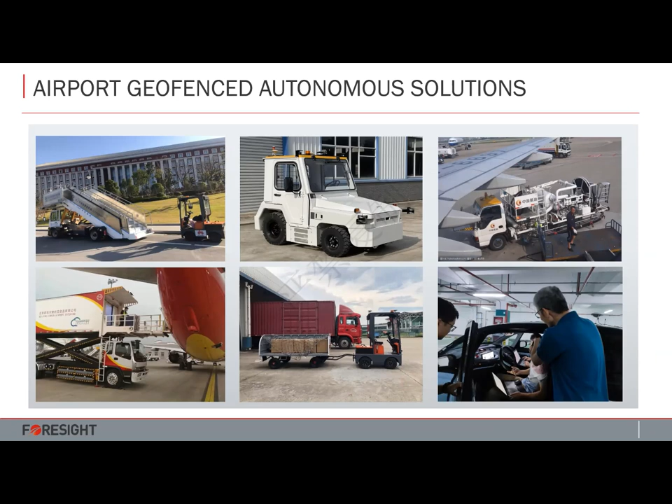About the airport geofence autonomous solution we are working on with SUNAWAY: different use cases include boarding trucks, autonomous logistic vehicles, fuel charging trucks, and other vehicles in an airport geofence solution. The first project is a boarding truck with a modular stereoscopic solution by Foresight integrated onto it, enabling it to reach as close as possible to the aircraft.

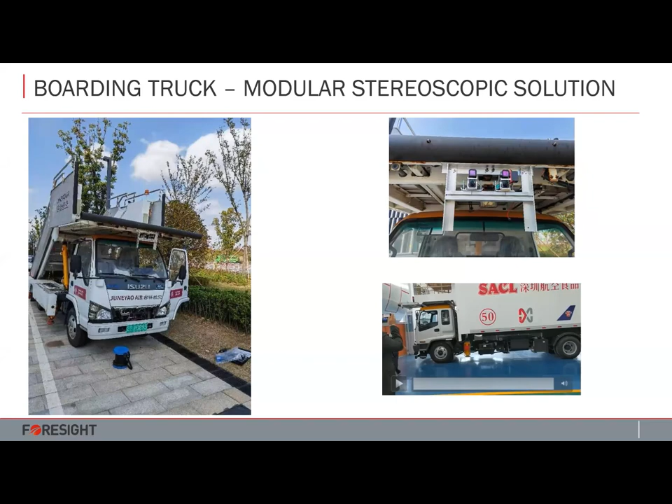You can see this in this video. Our vision technology enables the boarding truck to arrive within up to 5 centimeters distance from the aircraft safely, using our visible light and thermal infrared solutions.

Looking forward, we will continue our efforts in China in different segments, whether autonomous vehicles, agriculture and heavy machinery, or geofence autonomous vehicles such as airports. We will continue to be a player in exhibitions, conferences, and face-to-face meetings with leading OEMs and Tier 1 companies. We are very pleased and proud of our achievements in China, and thanks also to our dedicated team in China. This is on my side for today, thank you for your time.

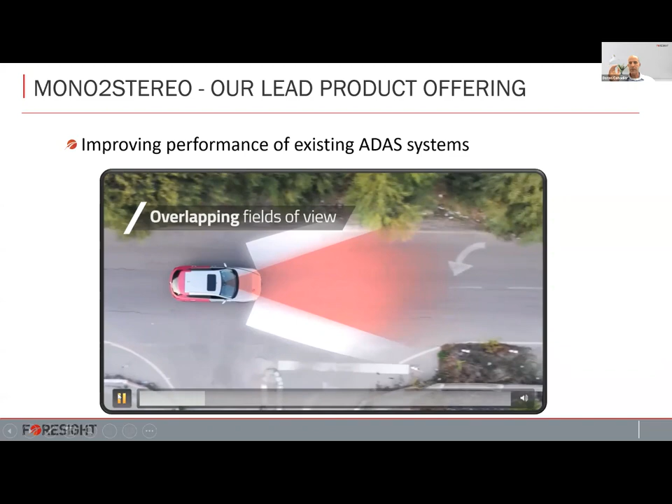So basically what you see here is a parking camera, an ADAS camera. It's already on the vehicle. They will continue doing whatever they do. Both of them are facing the same direction. The ADAS camera is in red - that's its field of view, a narrower camera. The parking camera is a wide camera, a fisheye camera, shown in white. As long as both of them are facing the same direction, in the overlapping area between them, we can create 3D perception. This is just a different angle of seeing the same thing.

Now, what you see here, this is the raw feed that we get from the parking camera and from the ADAS camera. The parking camera is a very wide camera, like a fisheye camera. The narrow camera is an ADAS camera.

Each one will continue doing their own application. Parking will continue doing the parking application, and ADAS will continue doing ADAS. What we do is tap onto the raw data coming out from these two cameras, and these are two completely different cameras, different field of view, different resolution, different locations, and not connected on the same horizontal bar. Basically, we create from these two different cameras a 3D stereo.

The basic layer is a 3D depth map. It's a pixelized color image. Every pixel has its XYZ location in space. Close pixels are colored in red, and as you go far it becomes blue. This is the basic layer, on top of which we add different layers like what you see on the right-hand side. This is the detection layer, showing the detection of all the vehicles and the pedestrian at the end.

So we're proving that with existing hardware, which is already on the vehicle, and a piece of software, we take it from 2D to 3D and provide 3D perception to the vehicle.

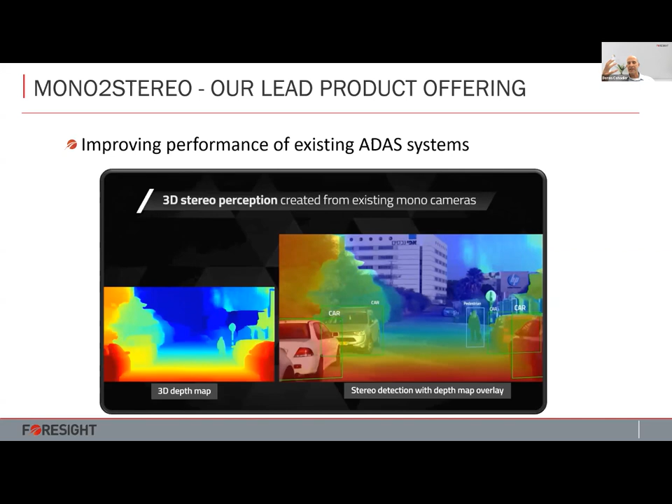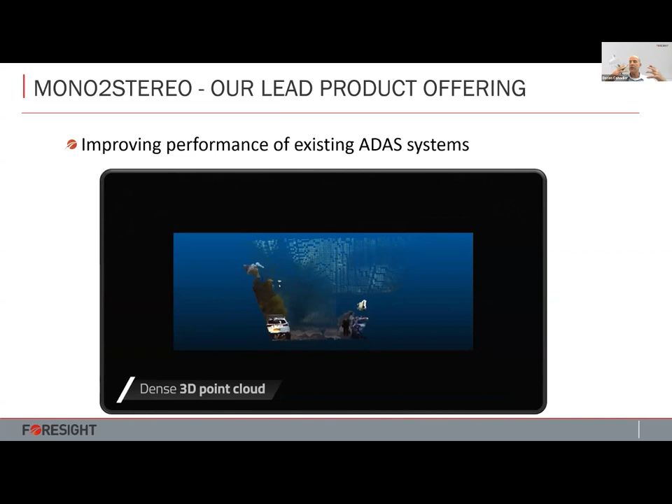Of course, taking the depth map, we can create point clouds. You'll see in a second. Point clouds are a different representation of a depth map, and this is how a LiDAR and a radar present data. However, since we're using cameras, there's more resolution, more pixels per square inch, therefore more information. So it's very dense in terms of information.

To summarize, three main points. First, the ability to create 3D stereo perception from existing 2D mono cameras. We're simply providing a piece of software, so the OEM, the vehicle manufacturer, does not need to add additional sensors. It just uses the existing sensors, adds software, and gets an additional layer of safety. By doing so, we can enhance the detection and perception capabilities of the ADAS system. This is our most leading product offering, and there's a lot of attention in this area.

Moving to another development, again based on the ability to separate the cameras with auto calibration. The automotive industry always wants to see further down the road, smaller objects with higher accuracy. If you remember, I mentioned earlier about more traditional stereo - it's limited in how far it can see and in accuracy. By separating the two cameras from the rigid beam of a traditional camera and placing them around the vehicle, we can now enhance the capability of the stereo.

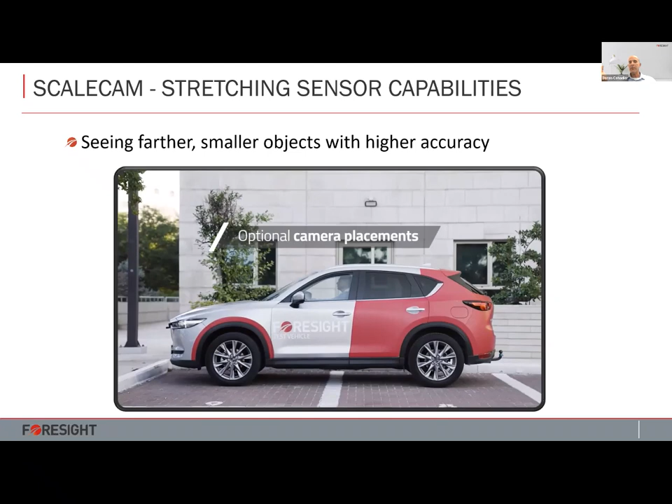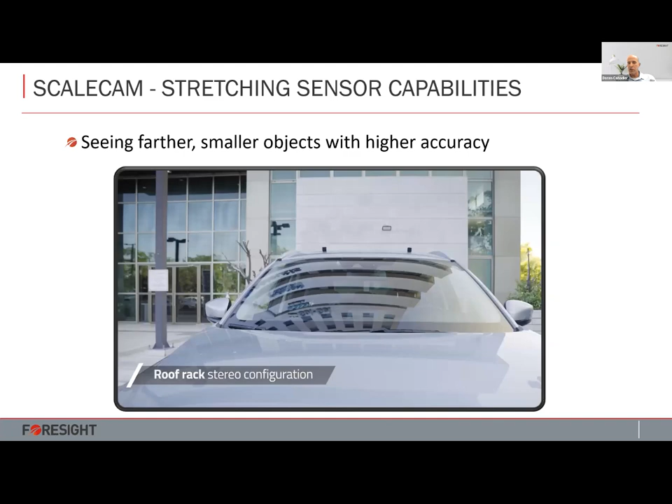What do we mean by this? For example, we can put the cameras not only behind the windshield, but in the side mirrors, in the roof racks, as you'll see in a second. Again, this is only for illustration - obviously it will be part of the vehicle, you won't see the cameras. We can put them in the grills, wider behind the windshield. There's a lot of real estate in which we can now put our stereo cameras on the vehicle.

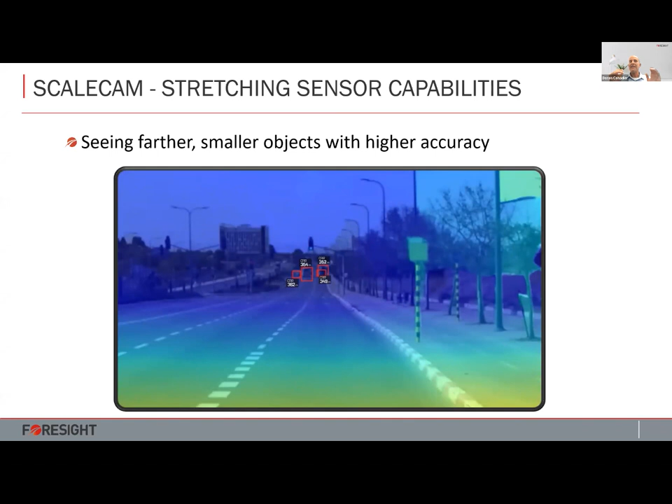A second advantage is separating and increasing the distance between the cameras. This represents a more traditional stereo, with a very small distance between them - we call it a baseline. Let's say we look at a truck a little more than 400 meters away. The accuracy error is 9% at 400 meters - we measure 436, but the actual distance is 400, so we're missing by around 9%. This is not acceptable by the automotive industry.

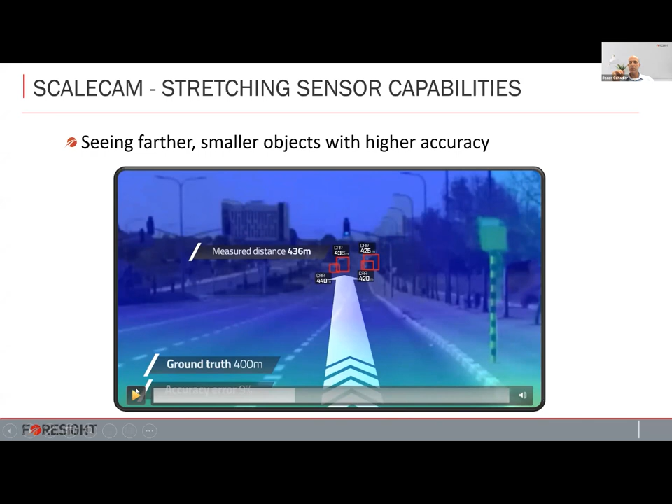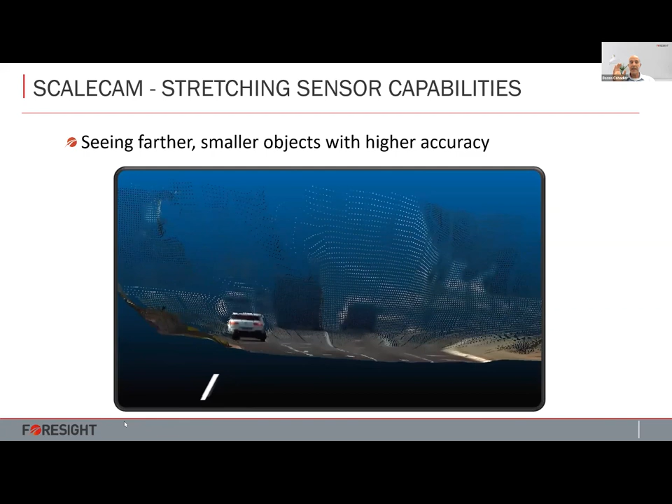What we do now, taking the same cameras, separating them so they're not connected, and putting them at the sides of the vehicle, we can increase the performance. So again, looking at around 400 meters with the same truck, we reduced the 9% error to 4%, which is good enough for the industry. So now we can see further down the road with higher accuracy, which is acceptable by the industry.

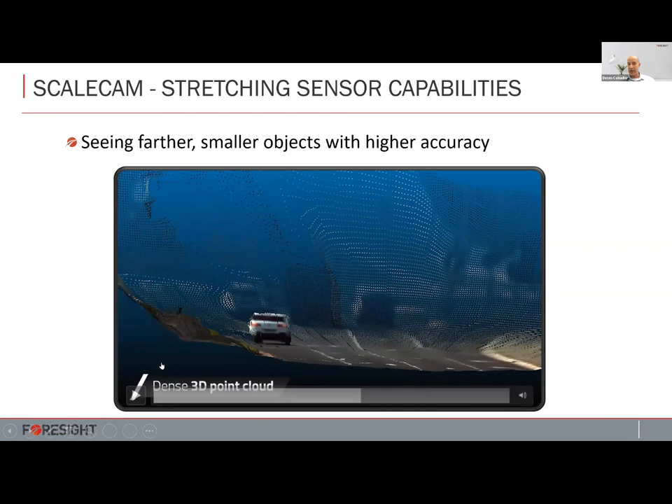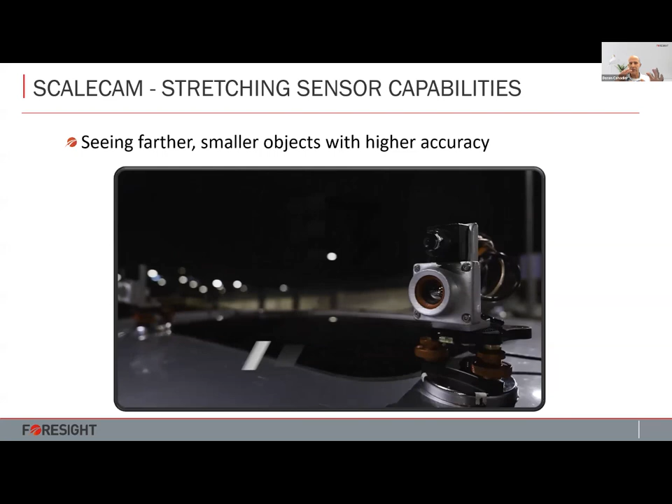Not to mention, we can create point clouds as well. In addition, we can do the same thing with thermal cameras. We mentioned earlier the talk about thermal cameras - thermal allows us to see under harsh weather conditions, not only at night, but in foggy and dusty conditions.

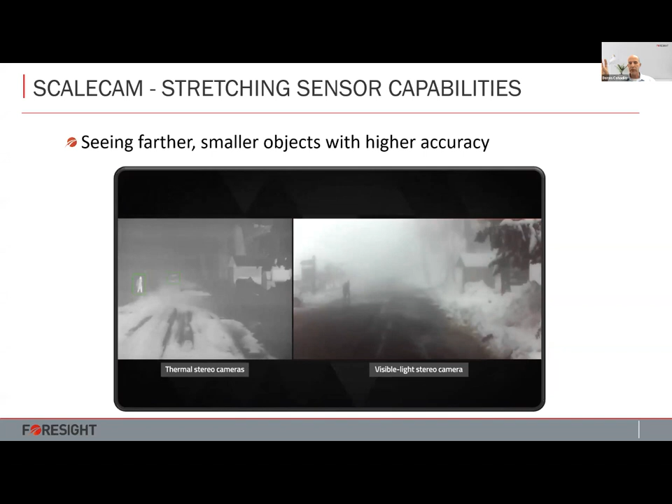You can place the thermal cameras anywhere you want on the vehicle, because with the automatic calibration, we can put it anywhere. And the more we increase the distance between them, the better the accuracy.

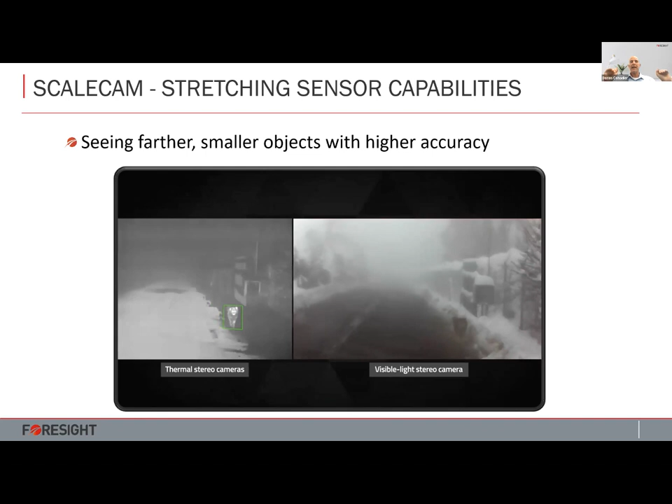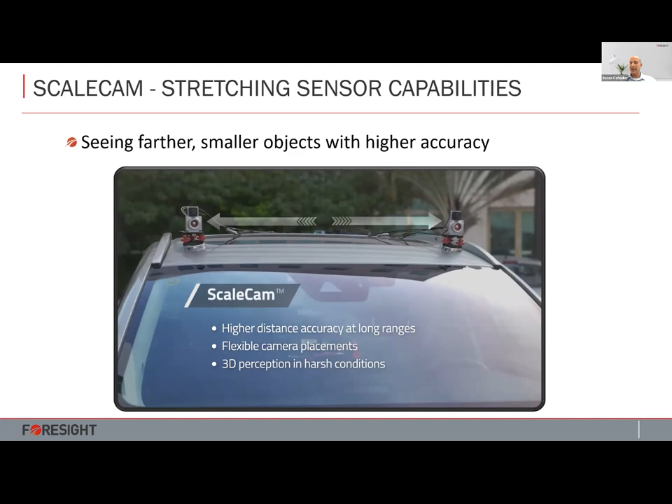So to summarize, ScaleCam, the ability to separate the cameras and increase the distance between them, allows us to see at higher distance accuracy with longer ranges, flexible camera placements, and provide 3D perception under harsh weather conditions. So these are the new developments, which lie upon the automatic calibration software I mentioned earlier. I want to take you a little bit to the latest success stories.

Basically, these are the success stories of 2022. We mentioned already Sunway-AI, which is a great success so far. In addition to that, we have a few more.

Hitachi on the right-hand side here, and we'll hear Sakata-san in a minute elaborating further about Hitachi. Hitachi basically develops stereo vision. These guys are stereo experts. It's a very large tier one specializing in stereo vision in Japan. And they developed the stereo vision solution for Subaru, Suzuki, and other companies.

We did already almost 2 years of work between us evaluating different technologies, and recently we finalized a proof of concept of the mono to stereo. As I mentioned, that's the most leading product. But I'll leave Sakata-san to talk in a minute and elaborate further about Hitachi.

ZF on the left-hand side, another success story. ZF is the third largest tier one in the world. Beginning of this year, 2022, there was a contest, a pitch event at CES, in which we competed with other startups in the field of ADAS and autonomous vehicles, and we won first prize. First prize is doing a joint proof of concept, again on mono to stereo. Now we've successfully finished it, and we're moving to the next steps, the next discussions.

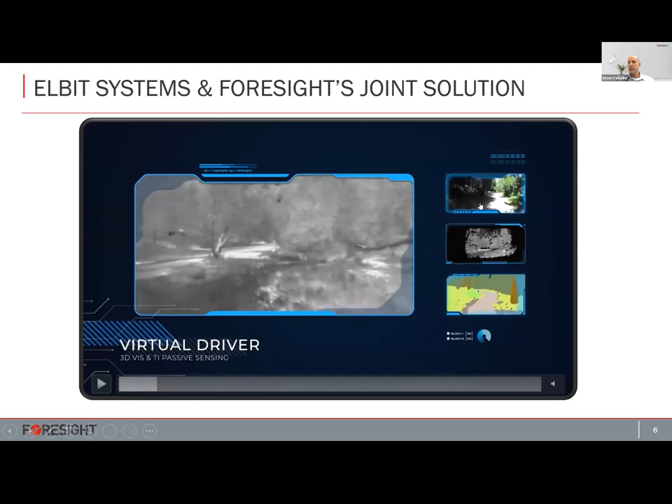Let me show you a quick video. What do I mean by perception? This is actually the UGV autonomously driving. What you see here are different views of our technology: this is a thermal point cloud, this is a visible point cloud, and different layers of information we provide the UGV.

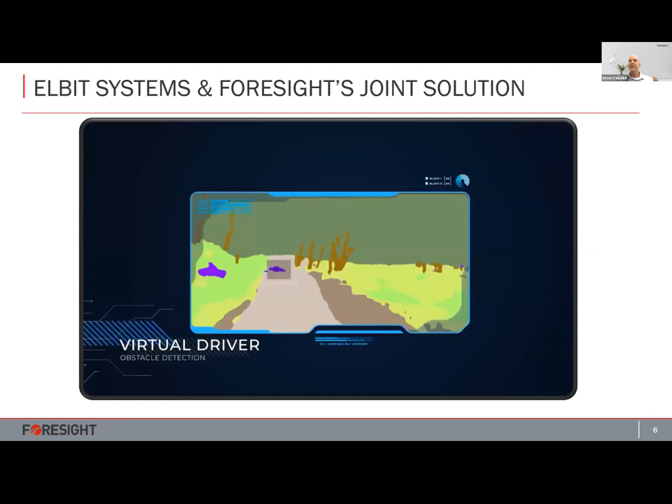Now it's planning a path to reach a certain area. It uses Foresight's perception in order to see the world in 3D, and based on this, it makes decisions. For example, in this case it has an obstacle on the road, so it calculates a different path off-road in order to go back to the path and continue driving, based on Foresight technology. So it's not only autonomous driving—there are other autonomous operations—and we're very, very proud of this work with Elbit Systems in the defense world.

Just to finalize a little and talk about the sales cycle: up until today, and we continuously do so, we engage with clients either through a technological roadshow, in which we fly over to customers and show our technology, providing them with prototypes and doing testing pilots. This leads us to the next stage of paid proof of concepts.

This is where we focus on demonstrating technological capabilities and validation according to customer specification and requirements. This takes, on average, depending on the statement of work and the vertical, somewhere between 3 and 6 months. We've already successfully finished a few proof of concepts—the ones I mentioned, Hitachi and ZF, fall under this category.

And when we're successful with the POC, we move to the co-development stage. This is where both parties jointly develop a tailor-made solution according to the customer's specification, aimed for a specific vehicle and application. This is exactly what we've done this year with Elbit, customizing our software for the unmanned vehicle I showed you. This takes on average between 6 to 12 months, depending on the statement of work and vertical.

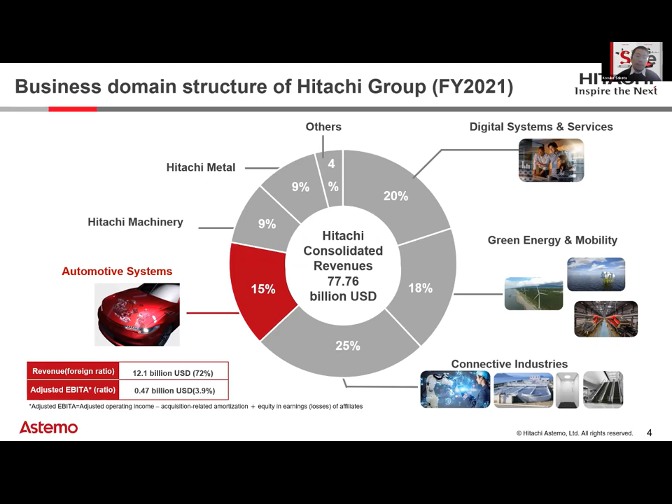Hitachi Astemo develops and manufactures all components of autonomous driving and advanced driver assistance systems. A particular focus in recent years has been sensing technology, and Hitachi Astemo has many years of experience with a 3D sensing device called a stereo camera. Its most famous product is the stereo camera sensor used by Subaru and Suzuki. The feature is that it uses two cameras to measure distance in 3D, just as a human eye does. This allows the system to provide safety in difficult situations where a single camera would be difficult to handle.

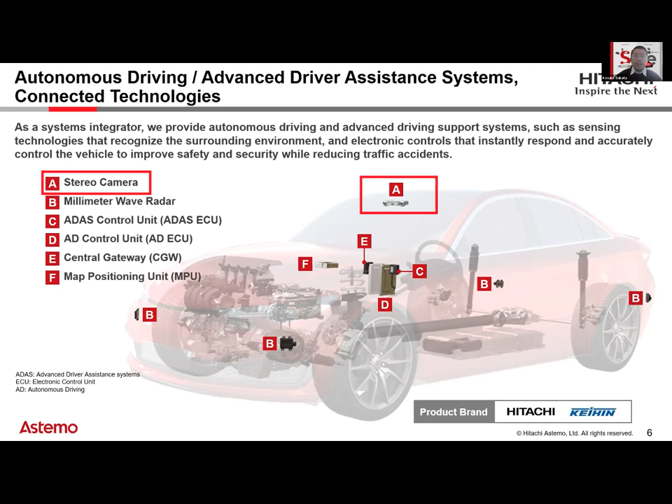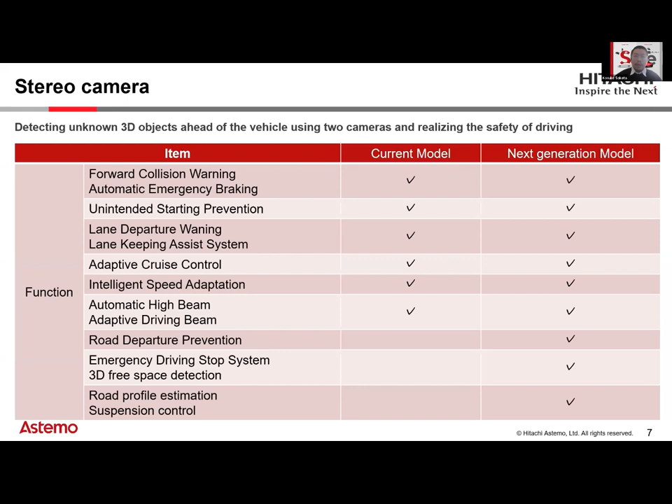Our stereo camera product can provide ADAS functions such as adaptive cruise control and lane keeping assist system, but we are developing the next version of our system, which will be able to handle more complex scenarios to meet the performance requirements of autonomous driving. For example, 3D free space detection will be possible.

3D free space detection is a technology that, as you can see, recognizes areas where driving is possible with a high level of accuracy. It will also be able to detect other small changes on the road surface, such as speed bump detection. We have been looking for a breakthrough to make these advanced technologies more advanced and viable products.

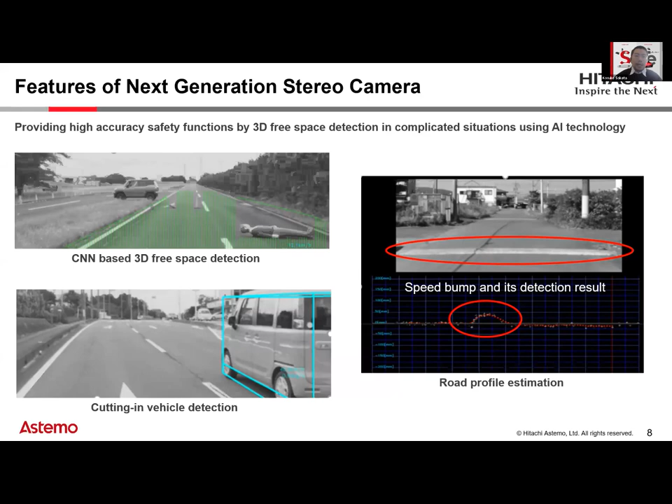And with our meeting with Foresight, finally it is starting to happen. We have been running a joint POC, proof of concept, with Foresight since 2021 to explore the synergy between their QuadSight or mono-to-stereo technology and our stereo camera systems. Finally, we have succeeded in realizing a new 360-degree stereo sensing concept in cooperation with Foresight.

To achieve this, the two cameras must be calibrated with high precision using software technology, and this is what Foresight had the great ability to do. We worked with Foresight to build this demonstration vehicle and exhibited it at our Hitachi Astemo Tech Show 2022 in Japan. Of course, the support from Foresight is excellent. All Japanese OEMs attended and were able to experience these technologies.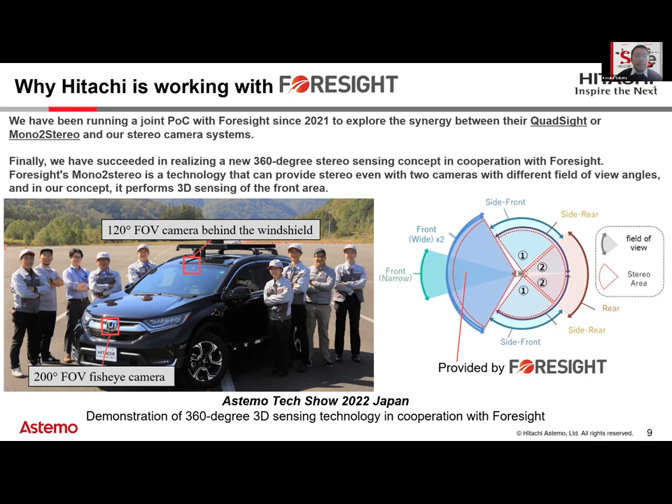And we received positive feedback from all of our OEMs. I would like to introduce just a few of them.

Accuracy is better than monocular camera technology - it is a highly competitive technology, according to Nissan. I understood that this is an important technology for realizing level 4 autonomous driving, and it has potential, according to Toyota. It can also be used to provide information to drivers - very good idea, according to Mazda. This is a very smart way to make effective use of the cameras that are already installed, according to Honda.

The success of the tech show and the positive feedback from OEMs is driving Astemo into the next phase. Hitachi Astemo will continue to work with Foresight to accelerate development towards the realization of 360-degree 3D sensing technology. We are now taking the next step towards commercialization and starting

another project under a new contract. With that, I will conclude my presentation. Thank you for your attention.